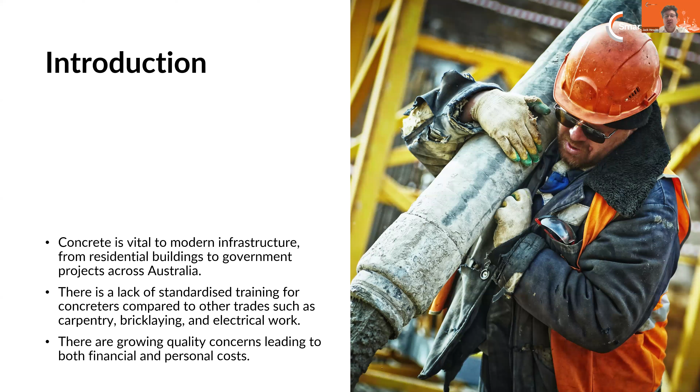The concrete industry in Australia currently lacks a standardized training framework. While Certificate 3 in Concreting is offered by TAFE and provides foundation, its adoption is inconsistent across states. In addition to TAFE Cert 3, we have the Grey Card program, which is specific to New South Wales.

This is mandatory on certain Transport for New South Wales projects. This training covers concrete work for bridges, concrete pavement base, and lean mix concrete subbase. This, however, is limited to New South Wales and does not address the national need for standardized practices.

Current training providers include Cement Concrete and Aggregates Australia, who offer various courses and a large library of resources. Current courses running in 2024 include Concrete Basics, Concrete Practices, and Agitator Rollover Prevention. Another training provider is the Concrete Institute of Australia, also known as CIA, which offers hundreds of training modules containing useful materials via e-learning programs.

The Grey Card system is another one, which is state-specific, but this can also lead to fragmented training practices.

There is a very large culture of on-site training in the concrete industry across Australia, the strengths of which are providing workers with real-world experiences that a training course could not. Many current training courses integrate this on-site training. One flaw is the development of a more conservative mindset on the work site, where knowledge and certain ways of doing things are passed down. This could lead the industry to being more resistant to change and new technologies, making it more difficult for modern workers to adapt.

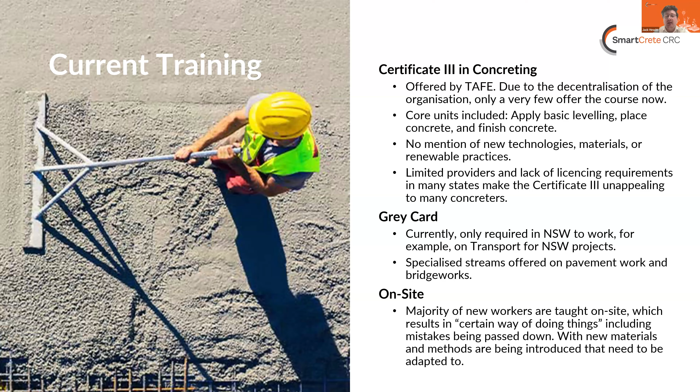Next up, we have the impacts. The lack of standardized training could lead to several issues.

One such issue is quality concerns. Workers, if not properly trained and guided, can cause errors, leading to structural integrity and safety issues. An example of this is when there isn't enough concrete between steel supports and the surface, which can lead to steel being exposed, causing rusting and damaging the integrity of the structure.

Economic costs: according to Oxford Economics, poor productivity in construction has cost the industry billions throughout the years. And lastly, personal costs: inadequate training increases the risk of accidents and health hazards.

Poor quality can lead to buildings being abandoned and residents left without a home, as seen with the Mascot Towers case. Many who rely on infrastructure and housing can be impacted negatively. This can also reduce confidence in the market, an example of a knock-on effect.

Another example of large-scale impacts in industry is that studies have found that in New South Wales, over 50% of registered apartments have had defects.

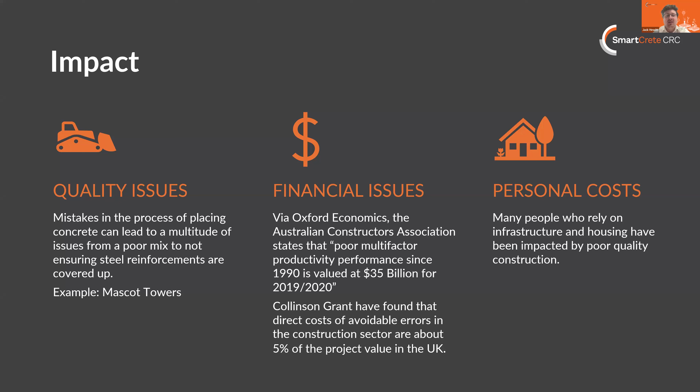Moving on to new technologies. New technologies like geopolymers and 3D printing are emerging throughout concrete industries. Geopolymers reduce carbon emissions due to being activated by a material known as alkali. This poses a potential health hazard, however, as it has a very strong alkali with a pH level of 14, which is the most caustic level, posing a health hazard to both workers and those nearby.

Another technology is 3D printing. This introduces IT components, which will necessitate new training in machine operation and digital model handling practices. Adding 3D printing machinery to work sites will require a more technical knowledge set on site to ensure the machinery remains operational. Current training is being provided by those that supply the machinery, another example of the decentralized training culture within the concrete industry. Both of these technologies highlight the need for updated and specialized training programs to ensure a smooth transition into the modern industry, where Australia will be at the forefront of technological innovation.

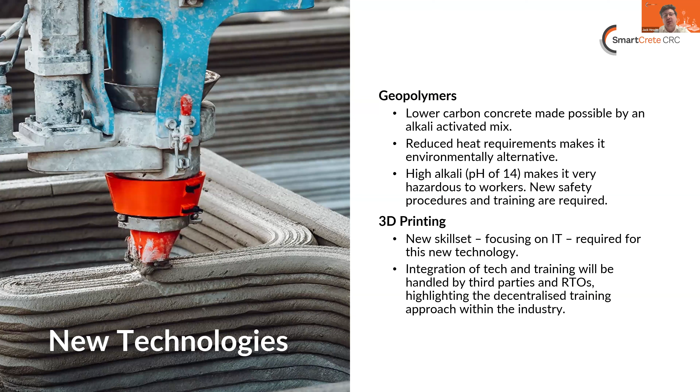Next up, a small comparison to other countries. First is Germany, which has a structured training system with strict licensure requirements for skilled trades, including concreters. This is covered in the Germany Crafts Act, which requires all contractors and business owners to acquire the Mastercraft certificate.

An interesting comparison between Australia and Germany is that both are federal states with decentralized rule makers, with states having great autonomy over their own rules and regulations. Despite this, Germany has a federalized minimum standard, compared to Australia, where the states set that standard.

In the United States, training standards vary state by state, just like Australia is federalized. But there are many established programs and certifications that could serve as a model for Australia. For example, the Concrete Institute of Australia has modules as mentioned earlier, but the US has ingrained those modules into a set of accredited training courses, mixing them together so workers and managers can choose to do it in a bundle, allowing them to have proper certifications and training for the workplace.

Next up are some industry insights I've acquired throughout these months of interviews. There's been mention of increased need for formal training, especially true regarding specialized roles. There are challenges regarding how new materials such as slag and fly ash are introduced and maintained, as it is vital for geopolymers in the industry as well.

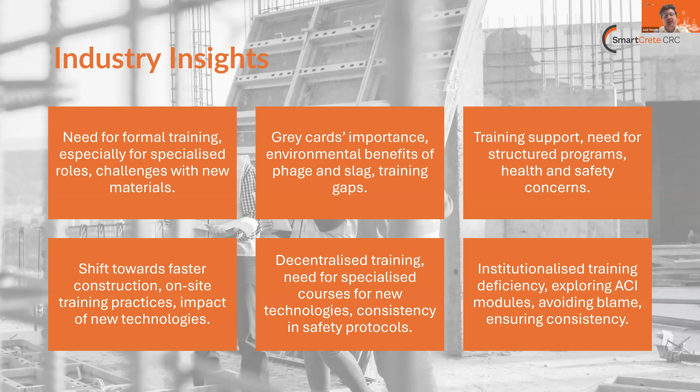And next up, we have the conclusion and recommendations. So based on my research, I recommend the following potential improvements to the concrete industry.

Implement a standardized training program. Now, what could we do to look at that? One option is the grey card program, as mentioned earlier. Implementing that at a federal level across Australia could be an option.

Another option could be a mandatory 6-month TAFE course. This could be heavily based on the existing Cert 3, so not much need for changes, but there could be updated modules to reflect the changing industry, such as introducing sustainability and technology courses. These steps could help align Australia with international best practices and improve the overall quality of concrete work.

And maintain that standard of excellence. In conclusion, standardized training in the concrete industry is essential for improving quality, safety, and efficiency. By adopting a comprehensive training framework and embracing new technologies, we can build a stronger, more resilient construction sector where Australia maintains said standard of excellence in this vital industry. Thank you for your attention, and I welcome any questions.

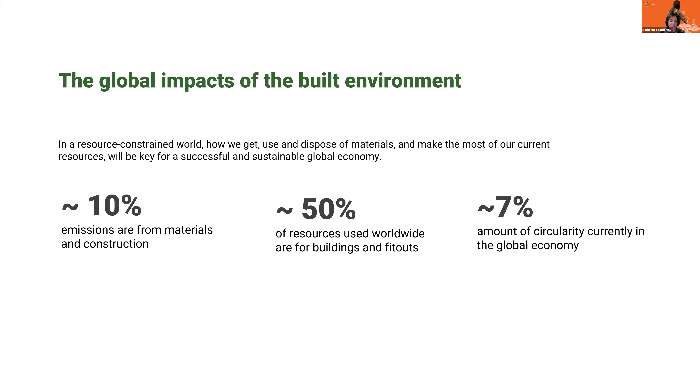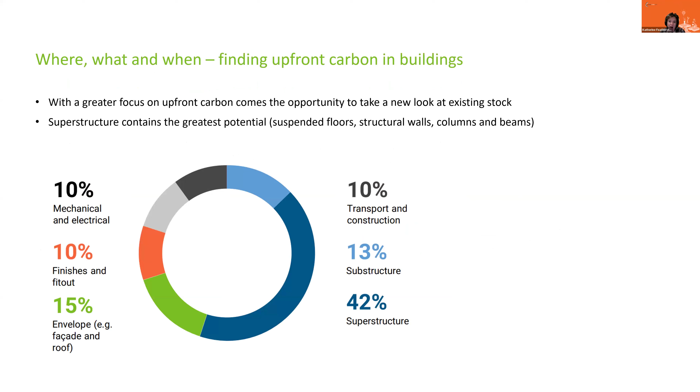Next slide. So if we look then at the practical guide for upfront carbon emissions, it's got a whole big bit at the front which talks about the details and project level hows and whys and whats of reducing upfront carbon, but also then goes into more detail on some of the amazing things that Smartcrete are doing, and other sectors as well, looking at reducing the embodied emissions of products and materials. So it's a really important place and space for us.

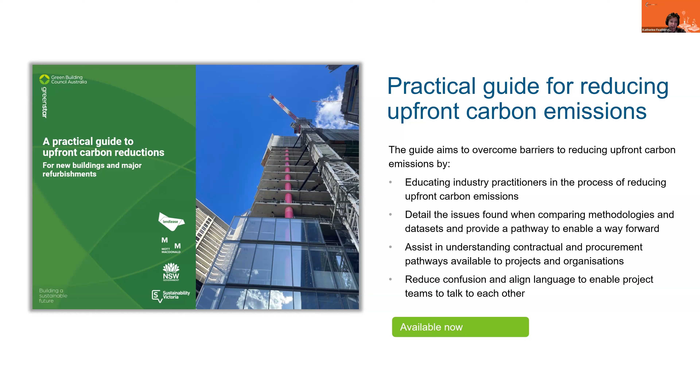With regards to educating people on this - it's a terrible slide, but next slide please because I just threw it together. Please be aware that we always have training, so for contractors, for example, and how we're helping to educate and make sure that these messages aren't just coming from us directly to developers or whoever is on project teams seeking a Green Star rating.

And actually, next slide please. Part of that work also looks at the Responsible Products Program. So that's another focus towards net zero. Next slide please, Claire, thank you.

We have a Responsible Products Program at the Green Building Council of Australia that feeds into the Green Star Buildings tool, version 1 at the moment, and it's being updated now as well. So some of these things are getting a little bit more stringent, but we have a calculator and database. We have webinars and masterclasses to talk about it. And we have a lunch and learn series as well for product manufacturers to help share some of the learnings that we've had in this space.

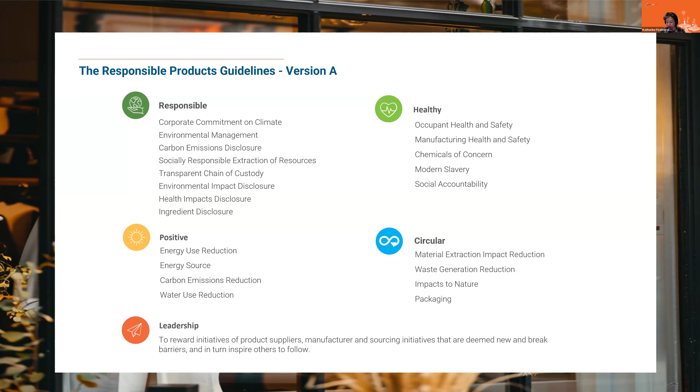That's been a really exciting thing to work with Smartcrete on too, and we're constantly touching base, which has been really great. I've raced through—I think I'm relatively on time, but if you have any questions, reach out. I'll happily share the link to our education page and the Responsible Products Program page after this. So thank you very much.

Thanks so much for that, Catherine. That was a fantastic overview, and I think sets such a great stage for the conversation we're having today around how we really empower that knowledge transfer and the skills. Because what you've talked to there is obviously all the great work and exciting things happening through the GBCA, which is brilliant, but also a little bit about some of the complexities here as we start to think about a shift towards decarbonisation for that products and materials space. So the fact that you're tracking tens of thousands of products within GBCA is awe-inspiring and perhaps a little frightening.

Very pleased now to introduce you to someone very well known in the concrete sector. It's a great pleasure to have him as part of our community. Michael van Koeverden is previous president of the Concrete Institute of Australia. He is a concrete technology and durability specialist and materials engineer. He's had a whole lot of experience working with concrete component materials and provides a lot of really great strategic advice, at the moment all funneled through CQT services. It's been absolutely fabulous having a great connection with you, Michael, and you've provided a lot of sound mentoring to us at Smartcrete as we've dived into this space. Thank you so much for joining us today.

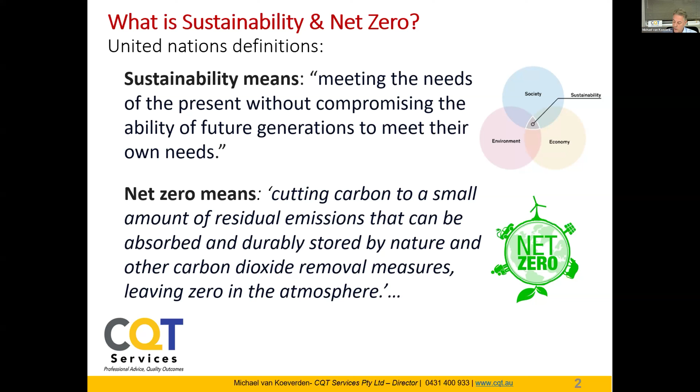And I want to talk about the practical side of measuring these things. So apologies if I'm looking to the side—I've got three screens running here, and it just is the way it's set up, unfortunately.

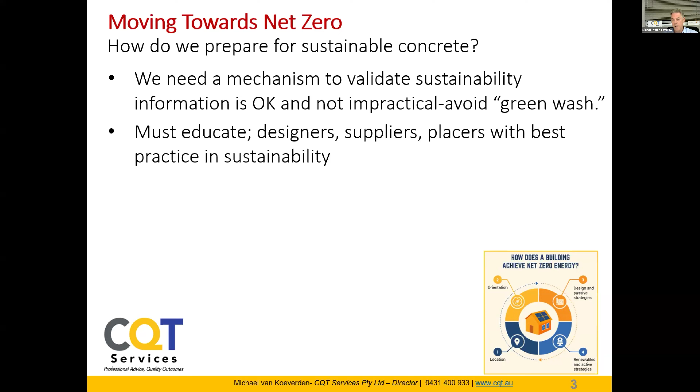So how do we prepare for sustainable concrete? We need to have a mechanism to validate the sustainable information that we get, that it's actually practical and avoids what's called greenwashing. What we don't want is advice that won't be supported by the sector because it just won't work or will cause other issues. Part of that is we must educate designers, suppliers, and placers with what is best practice in sustainability. There will be some changes they will expect with different materials, different processes, different expectations, and that needs to feed into a mechanism that can be sustainable itself.

So not all concrete can be net zero, and that's because different parts of the project require different things. We need to recognise that overall we want to work towards net zero, but there are some things that are going to be very difficult to get to net zero, certainly in the short term, until we get net zero supply materials. So again, we must educate the people within that sector, the designers who will decide the way we need to head with respect to sustainability.

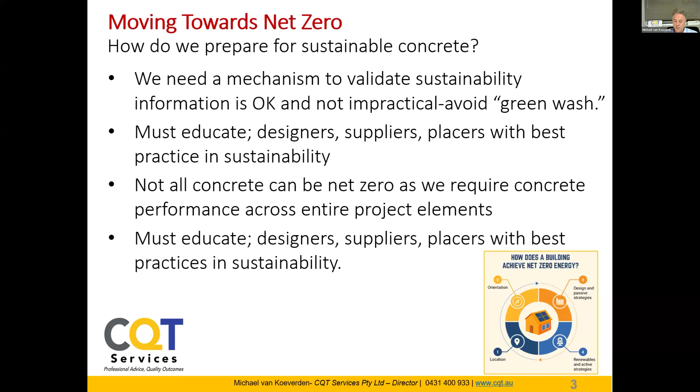Suppliers who will need to supply to those requirements, and the placers who will need to handle this material that's going to have to be put into the structures we are dealing with. So there are things designers need to think about.

They have government or project requirements for embodied carbon reporting, and this is becoming more critical for designers because of legislative requirements. Transport for New South Wales has started looking at putting costs on carbon after 2045. At a conference I attended, they said engineering designs must perform and have net zero or limited embodied carbon footprint, quoting $123 a tonne for CO2 after 2045.

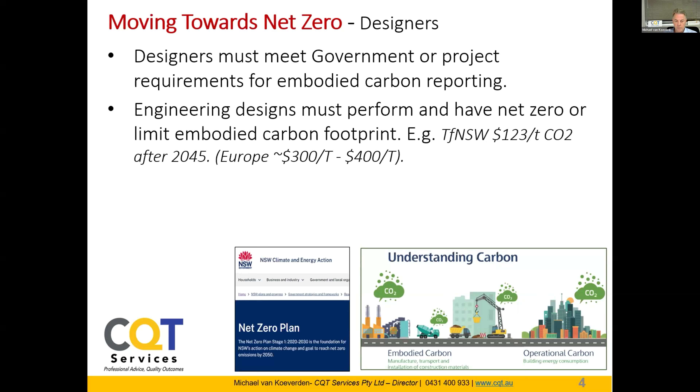But Europe and other places might be somewhere between $300 and $400 a tonne. So it's going to incentivise designers to say, we really need to work on options that can give us truly measurable embodied carbon reductions. Designers need to decide how they will achieve this.

There are many ways to do it, but they have to be careful, because during a project duration things can occur. What we can't do is put carbon-rich material back into a project to fix a problem caused by poorly selected sustainable concrete or process. So we can make it worse, in other words.

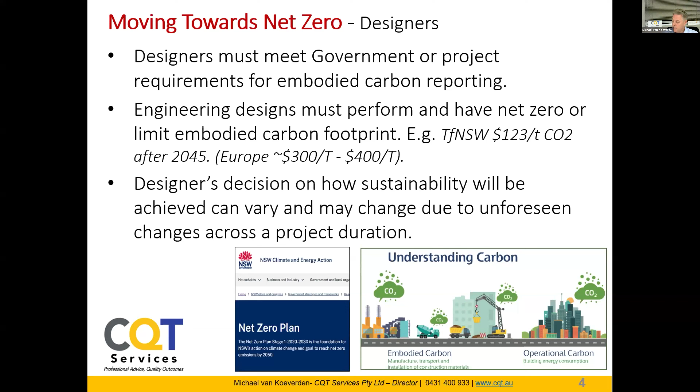So we need to understand carbon, and that's part of what those graphics at the bottom of the page are talking about. Concrete as a material is actually really good for embodied carbon when you look at it across its cradle to grave.

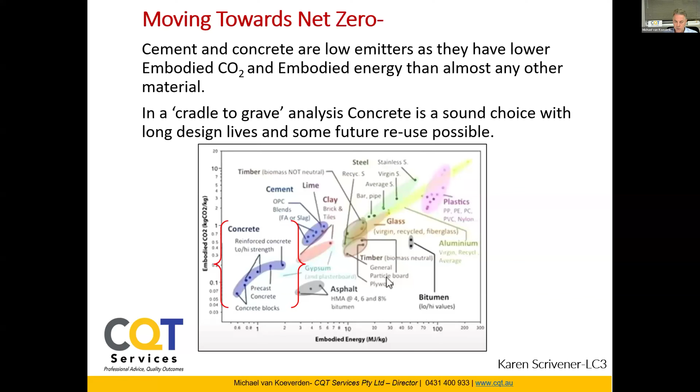This was highlighted by Karen Scrivener, a very well-respected cement chemist, who pointed out that concrete is actually quite a sustainable material because it can be reused. We can turn it into road bases, recrush it, and use the aggregates in new concrete if we need to. There are things like that.

We heard from Catherine just now about the Green Building Council. We've got Green Star and the ISCA Infrastructure Sustainability Council approach that we can also apply as designers. That all needs to be tempered with the right model.

If you're comparing how much embodied carbon you're reducing, you must have the right reference case. A straight cement reference case does not represent what's being delivered to the supply sector at the moment. It needs to be, for example, a 25 to 30% fly ash reference case. If I can reduce past that to net zero, then we're all good. So that has to be realistic.

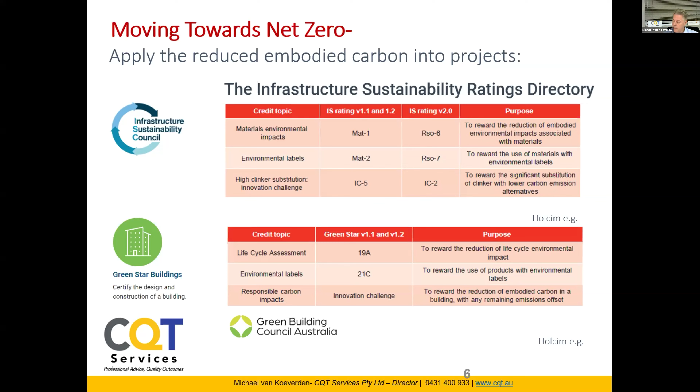I think designers recognise that and need to recognise that. So what role can bodies play in achieving that? Well, the Concrete Institute of Australia, which I've had a lot to do with, is a professional association for members wanting to stay at the forefront of concrete research, technology, application, design and construction. They promote excellence in concrete, knowledge dissemination, professional development, industry collaboration, and have representatives on key bodies like Standards Australia.

And the members, the largest member group are design engineers. So this is a really clever way to get to design engineers with well-prepared, well-verified information on sustainability and the deliverables of how we could get to that point.

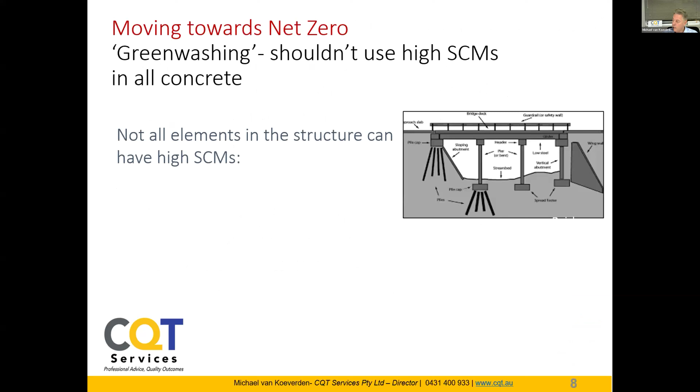Greenwashing, as I said earlier, we can't just keep throwing supplementary materials into concrete and expect it to perform, because it won't work for all parts of a bridge, for example. We may be able to use it for some parts of the building like piles, which can sit in the ground longer for the construction program, but things like post-tensioning of floors can't always be achieved that way.

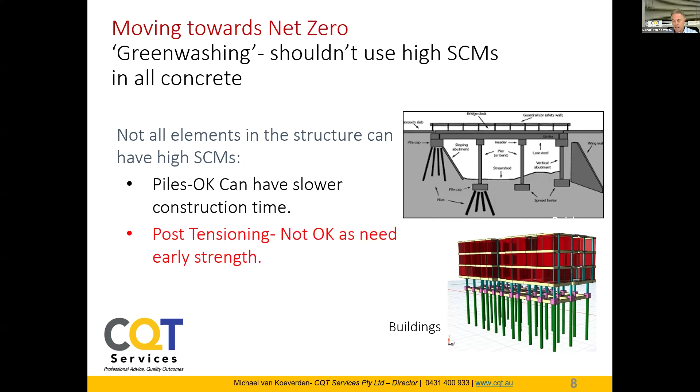Okay, there are things like activated slags, such as Envisia, which can do that, but to get that scalable across all projects relies heavily on the slag component and its availability.

Protocols such as MECLA are a really important tool put together by bodies from the industry and the construction sector, looking at how we specify low carbon concrete and what the EPDs, environmental product declarations, will contain. We require verified EPDs, and we set carbon reduction targets within the supply chain. In other words, we apply what's actually possible.

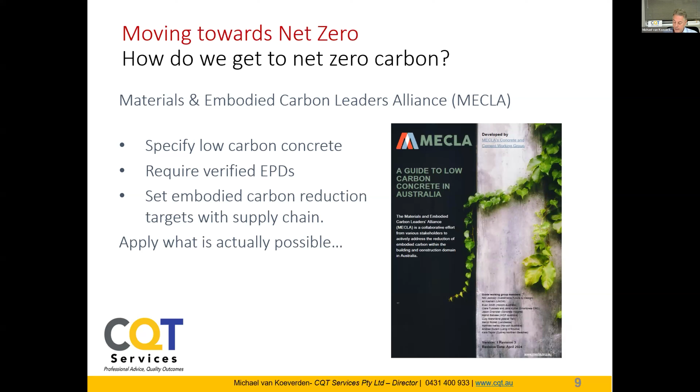I think that's the key thing here, is we don't get caught up in, oh look, in theory this is good and this is good, yeah, but not scalable. It's not at the scale we need. We have vast amounts of concrete supplied every year, and we need a scalable solution.

EPDs themselves - we have bodies like the Cement Concrete Aggregates Australia, who are the peak body for members operating cement manufacturing, distribution, concrete batch plants and quarries.

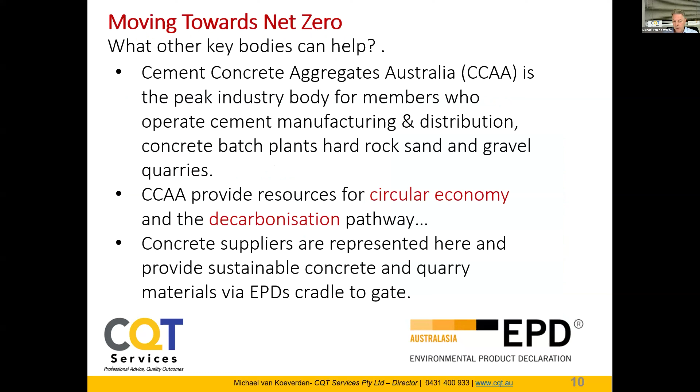They provide stuff like circular economy, decarbonisation pathways, and represent suppliers via EPDs. They're also looking to work on a standardised EPD for the industry.

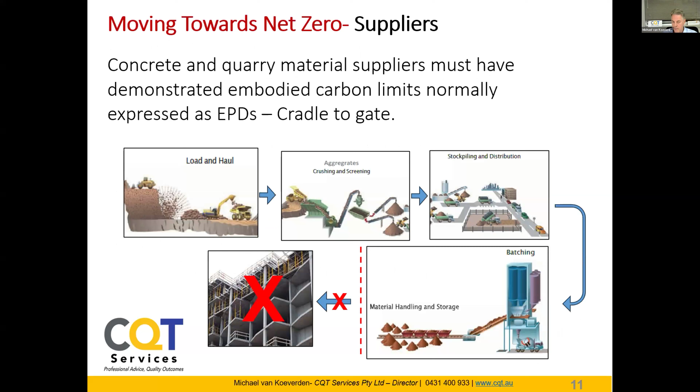Concrete and quarry material suppliers are cradle to gate: load and haul, aggregate crushing and screening, stockpile distribution, batching, but that's as far as it goes. It doesn't go to site because that's cradle to grave. So cradle to gate, the supplier EPDs only go to the supply gate of the supplier. We need to make sure we understand that, and designers need to recognise that. They have their own EPDs.

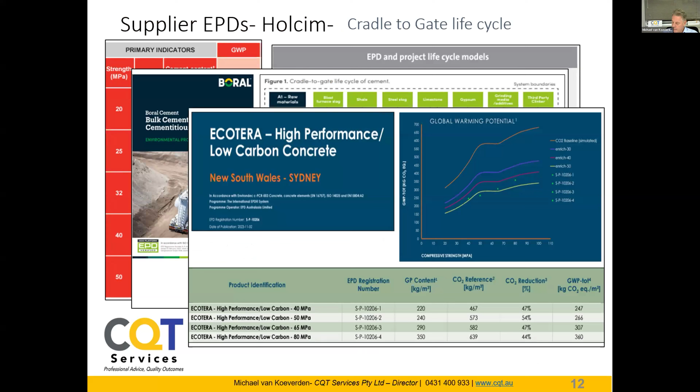Here's an example of one supplier, Holcim. Boral have their own, Hanson have their own, but they talk about embodied carbon, cradle to gate, not cradle to grave. It's got to be really clear on that.

So the placers of these concrete have to recognise if we are using higher SCMs, you get lower early strength, higher later strength, extra curing needed, lower abrasion resistance on surfaces, and we may need post-tension stripping times.

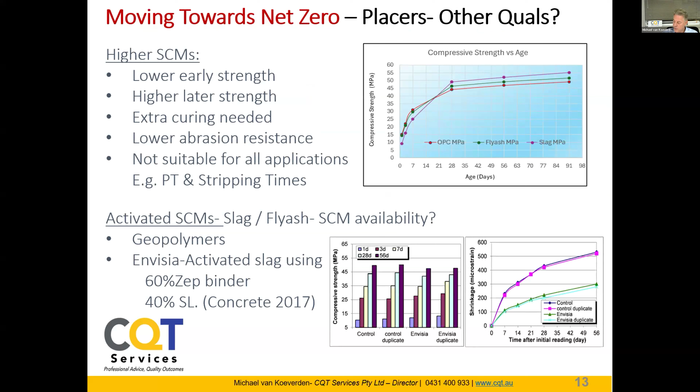I've rushed through, Claire, because of time, but the key thing for me is we need to understand what is valid sustainability information so that it's valid and workable for all levels of the chain.

Bodies like the CIA, the Cement Concrete Aggregates Australia, can provide guided information at the levels in which they plug in. Concrete Institute at the professional engineer designer level, and CCAA can be at both levels, in terms of industry documents and guides. And then under that, we can have a lot of other things, and there's also micro-credentialing, which we spoke about in a moment.

Designers need to specify an embodied carbon limit based on what can actually be achieved. The designers have to be connected with the suppliers to understand what can we actually achieve at scale across the full duration of the project all year round, because it can be affected by the seasons, and as we know, the weather's changing rapidly at the moment.

Remember, the embodied carbon is across the whole construction, not just at the commencement. So we can't have something that hijacks the total carbon footprint because we hadn't thought about that and didn't have a backup plan. Designers have a big role here to play in what is our plan if we don't achieve these parameters within the time frame required for the construction plan.

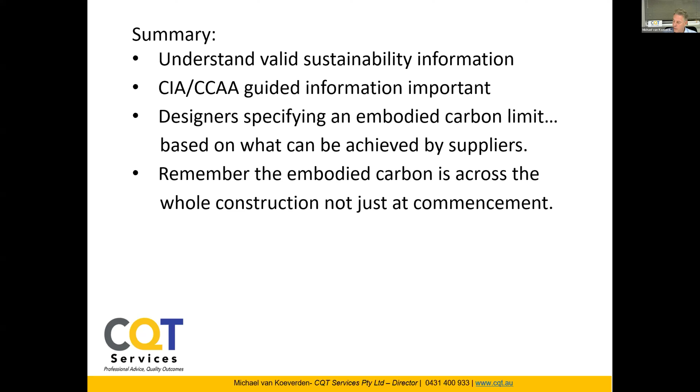Variations may need to be using higher carbon materials. Just be careful of blowouts on carbon limits, which is possible. You could have a problem with a sustainable mix that requires a heavy carbon rich mix that ends up driving our carbon up, our embodied carbon for the whole project.

So the key takeaways: we've got to track our carbon and remember that the costs will bite along the construction chain all the way down. Recognise the role of those involved in the construction sector. The designer has a key role in dictating the market and dictating the construction.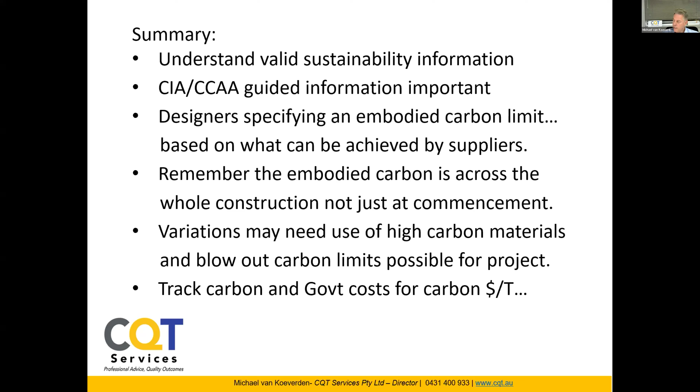The supplier has to supply within the requirements that they have stated within the EPDs. And then the placer has to be capable of placing that material, pumping it a long distance, finishing it at high-rise buildings through all different parts of the sector, but also recognise that changes in behaviour may be needed, longer curing times, and other aspects. So for me, that's as far as I can go today in my time allocation, Claire, and over to you.

Thanks so much, Michael. That was fabulous. Such a great point, thinking about this from the perspective of greenwashing, making sure that we're really looking at that from solid evidence-backed information, that we're not potentially going down the pathway of just sharing information that is not legitimate. And also, I think to your point around the cradle to gate and the way that we measure these things, there does seem to have been a shift in the policy discussions recently, really driving towards life cycle assessment as opposed to cradle to gate.

And I know that there's been a lot of work done by NABERS in terms of what does embodied carbon mean. At the moment, their calculators are only going to track that carbon from cradle to gate through the use of EPDs. But I understand that they're going to have a voluntary life cycle assessment calculator actually included in their measurement systems when that release occurs. And so I think the transition to that conversation about cradle to grave is a really fantastic one that we're seeing.

So thanks so much, Michael. Our last speaker today is Carly Cosmos, who joins us from the Institute of Applied Technology Construction.

Carly is an accomplished vocational education training professional with over 16 years of dedicated experience in the education and training sector. She's leading the Institute of Applied Technology and Construction as the Senior Operations Manager for TAFE New South Wales. The Institute of Applied Technology and Construction is a New South Wales government initiative in collaboration with TAFE New South Wales, CPB Contractors and Western Sydney University, and it's delivering micro skills and micro credentials to the construction sector.

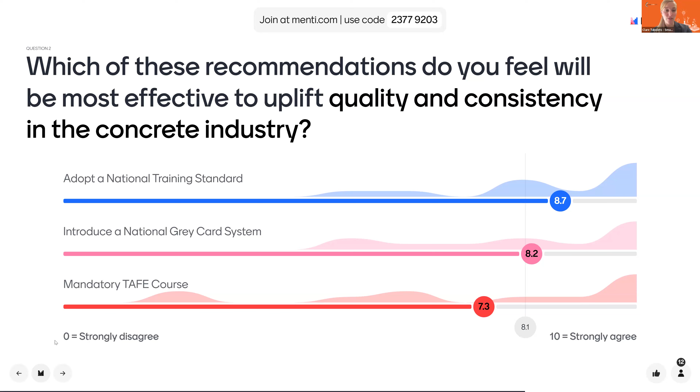Suppliers working closely with contractors, need to replace current developers and managers who haven't graduated - it's an interesting one, especially thinking about where a lot of training is directed at the moment. It was great to see Michael talking about how engineers and designers are currently very well engaged through programs like the Concrete Institute of Australia. That's a fascinating one to think about - how do we actually make sure those informed, educated people are leading our developers?